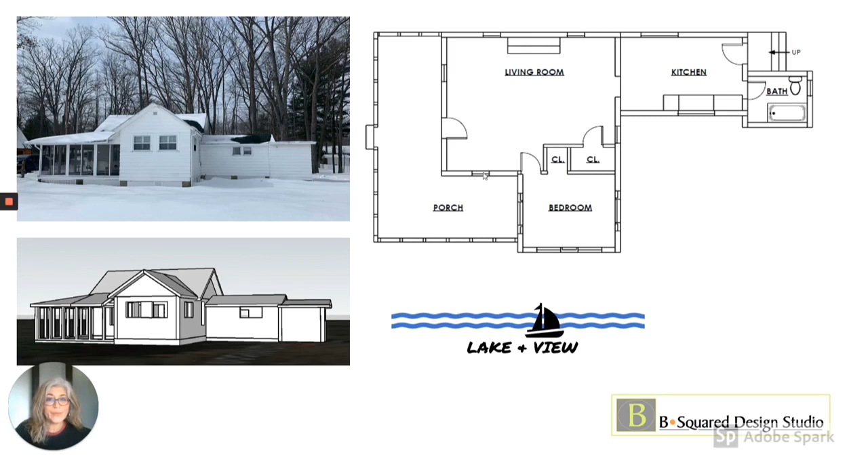The major issues the homeowner has with the house is the fact that it looks like there have been additions added over time, and the house doesn't look cohesive. Also, those additions have cut the view from the living room or great room off from the lake. The view side is on this side of the house, but the bedroom and porch additions cut off the view, and there's only one small window that looks out to the lake.

The homeowner provided a pretty detailed sketch of what he wanted to see happen with the house. He also provided an inspiration drawing, kind of the direction he wanted to head with the exterior.

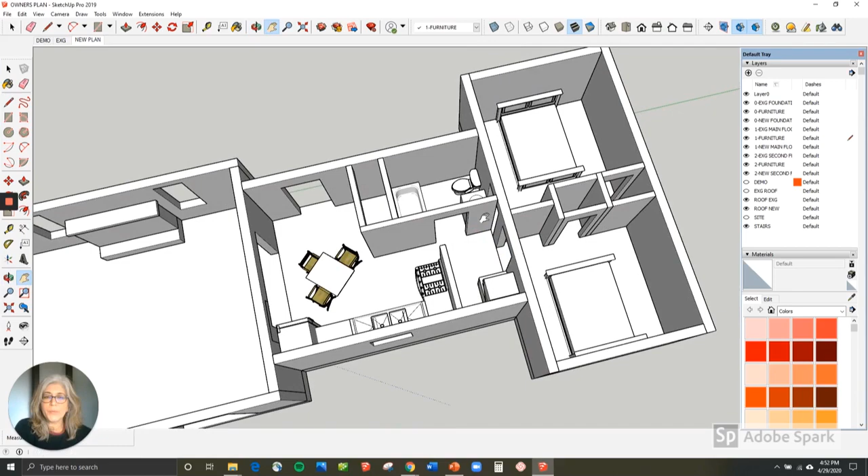Once we got the homeowner's drawing built as a 3D model, we realized we had a few areas we needed to work on, specifically the entries into the bedroom and the space for the bathroom. The kitchen is a little tight, and we were also kind of short on closet space, so the homeowner decided to add a couple of feet to each bedroom.

We modified the original sketch to develop two options for the homeowner: one that's closer to the original sketch with the kitchen in an L shape, and one that has the kitchen more as a galley kitchen with a door at the end out towards the lake. The homeowner was able to consider each option.

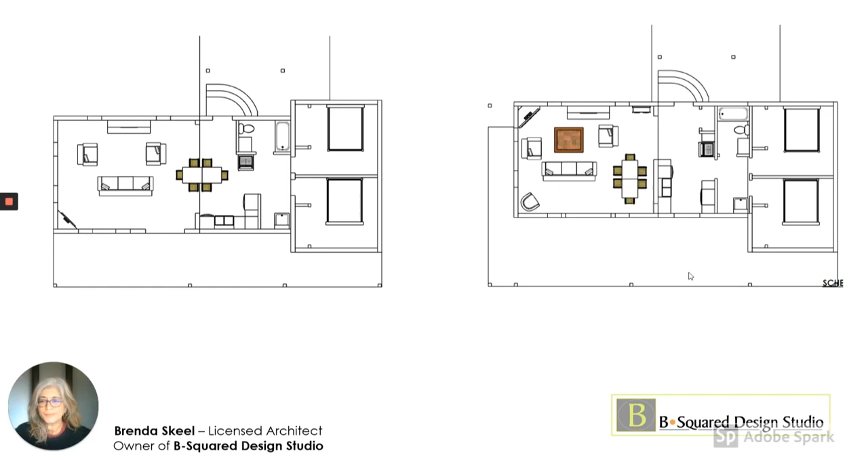The homeowner decided he wanted to see the galley kitchen option developed further, so we worked on this model to set up the roof line and came up with this set of options, because there were a couple things we could do differently with the great room. We could either add a slider door in the great room or have a picture window.

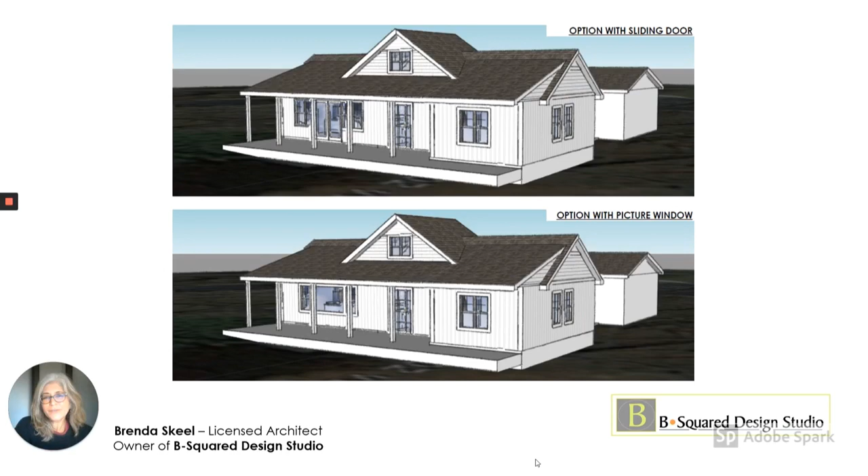Ultimately, the homeowner decided that while he liked the way the plan was coming together, he wanted to see some different options for the roof line. This wasn't quite what he was looking for.

So we turned our attention exclusively to the exterior and the roof lines and developed a series of options that would preserve the original trusses but also completely transform the exterior of the house.

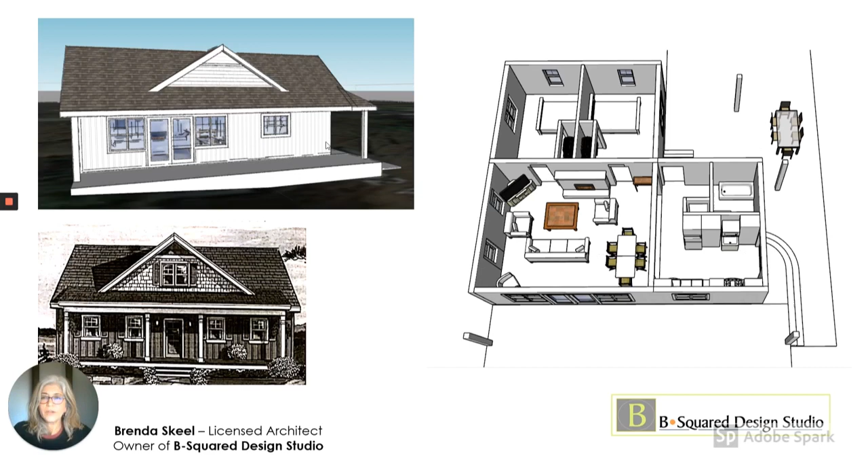We even tested a completely different plan option where we moved the bedrooms to the back of the house, which gave us a totally different kitchen layout and also allowed us to square off the floor plan so that we could create a roof line that more closely matched the owner's original inspiration image.

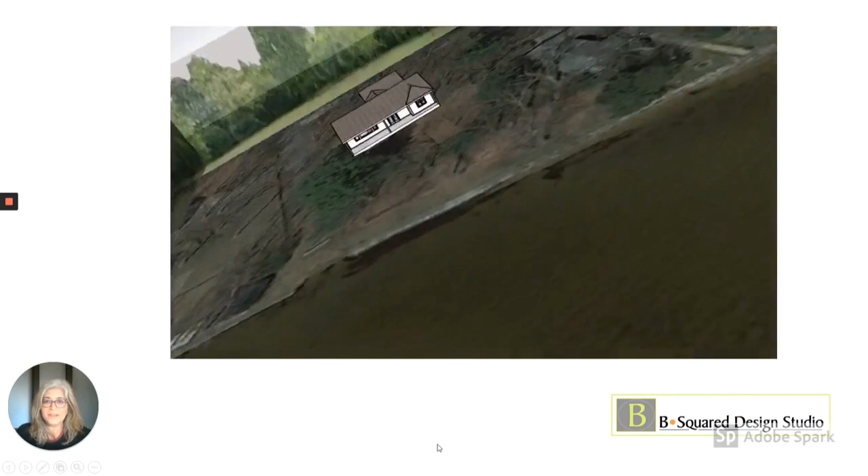So let's take a look at the homeowner's final design. You can see it's the same house on the lake, but it has a nice, clean, cohesive roof line and great views out to the lake.

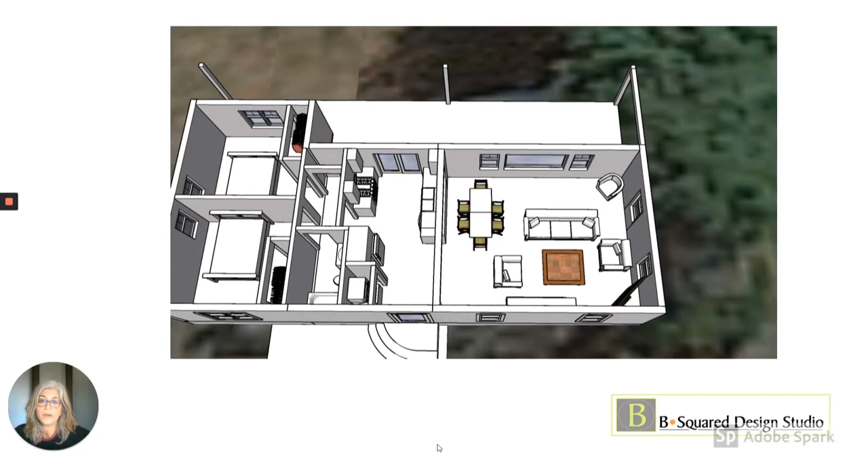It also has a new front porch on the lake side and a breezeway connector to the back garage. The plan is essentially the same as what the homeowner provided, except we went with the galley kitchen option, which provides a door out to the lake side from the kitchen.

And the sink has a view of the lake from the great room windows, but also the person at the sink can talk to the grandkids in the great room.

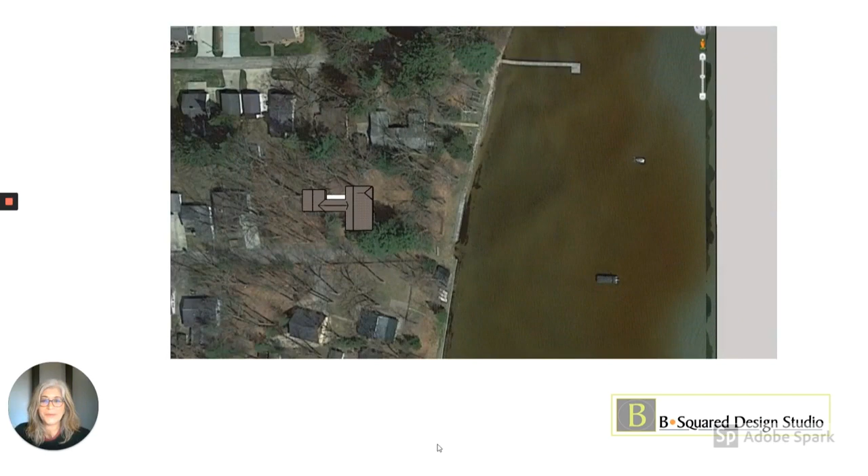It's fun to see the number of ways a home can be transformed, and we would love to work with you on your project.